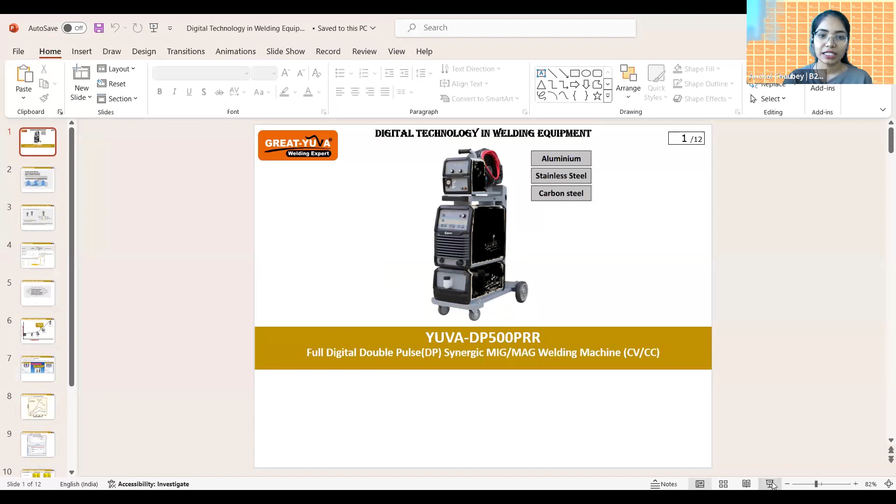Amrit Yoga has also established technical training institutes such as MACE Manesar and collaborated with industry associations and government bodies like CII, IIW, IWS, and MSDE. Additionally, he has partnered with the Japanese Ministry and Industry Association for knowledge exchange.

His expertise lies in welding technology, particularly arc welding and its components, equipment, consumables, and shielding gases. Mr. Amrit Yoga will discuss digital technology in welding equipment.

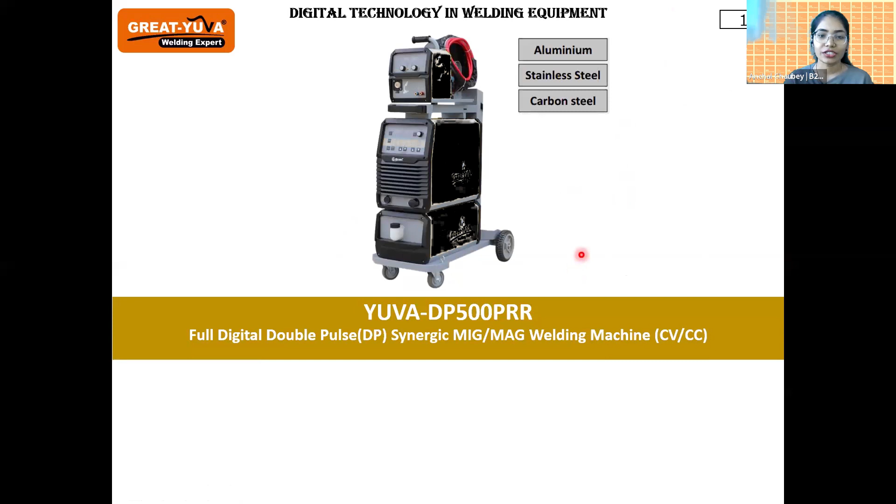So I'll talk about a digital technology which is catching up in industry, and there are many benefits: it is saving filler wire, and it is helping the operator create a very good weld. Even if the operator makes little mistakes, the machine forgives the mistake and supports him to create very good welding. This feature is very important because PM Modi's slogan is make in India for the world. So unless we make the best of the best product possible, we won't be able to export it for use abroad.

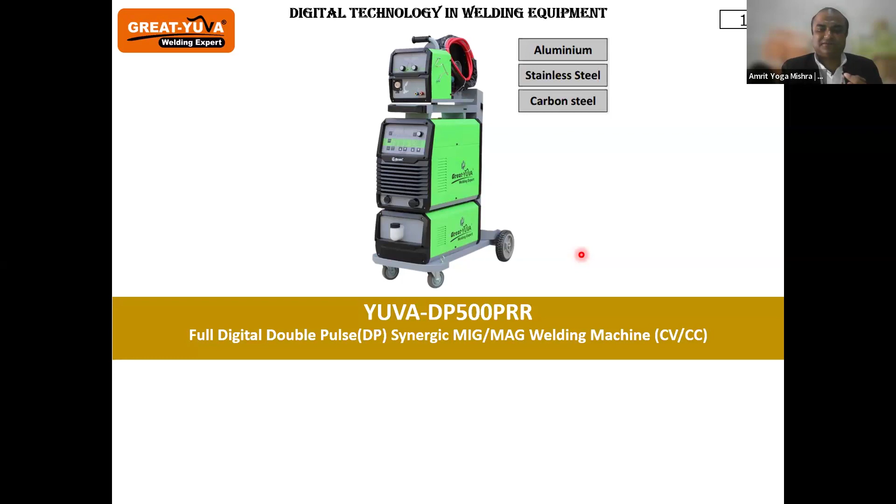So I'll talk about the double pulse welding machine, which is digitally controlled. You can see this is double pulse welding. It gives almost a TIG-like bead appearance, a very high aesthetic standard. The speed is of MIG, but the quality and aesthetics you get are of TIG.

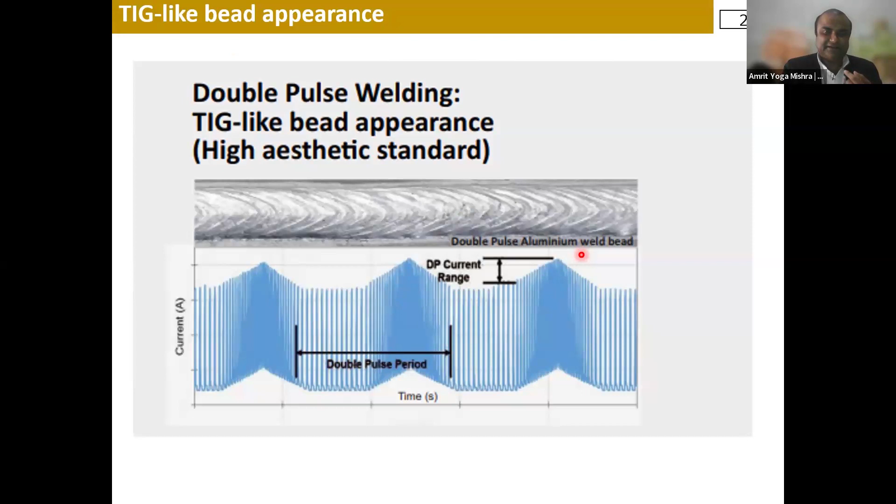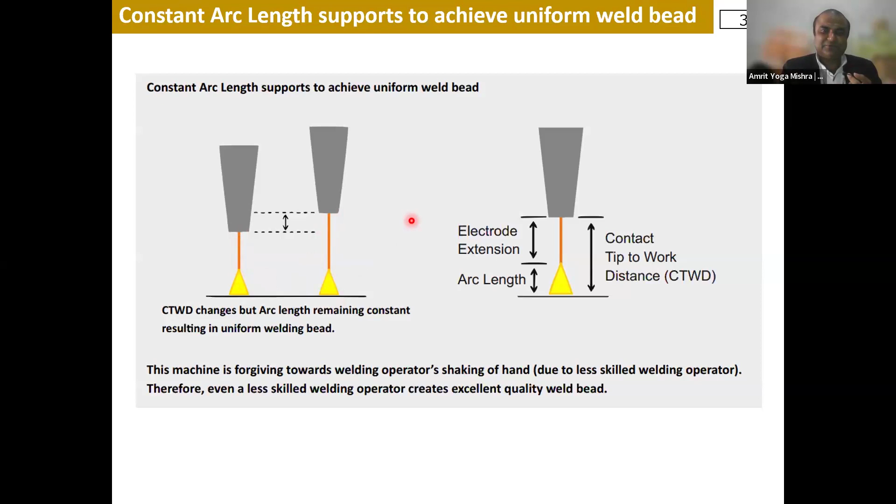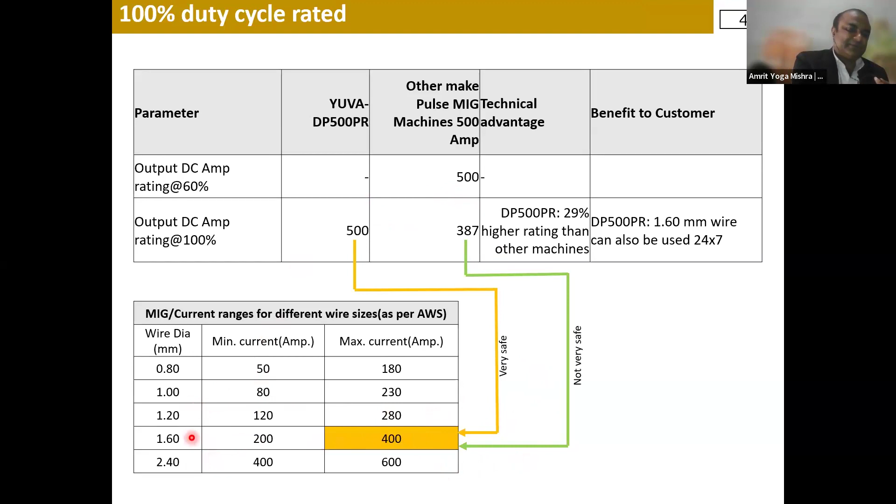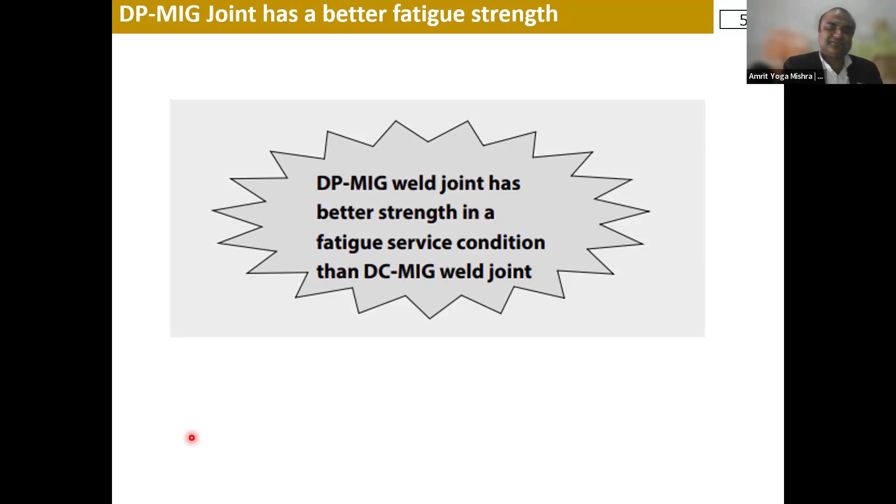I would like to explain how the evolution of the welding machine has taken place over the last 100 years. First it was only transformers, then diode-based rectifiers, then thyristorized, then there was a step change in technology, the inverter with analog control. And the latest machine which I am talking about is the inverter with full digital control.

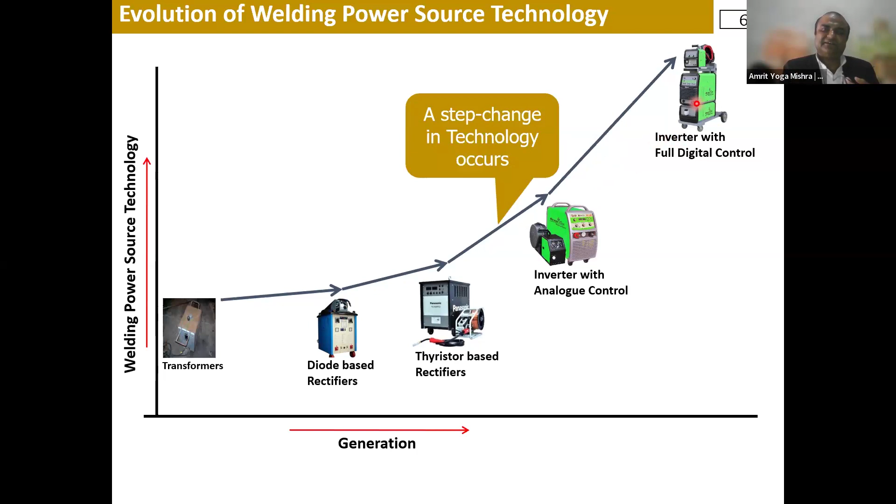It is almost double the price of a basic inverter machine. But customers have now started to realize the importance and benefit they are getting out of it, and they are slowly implementing it on their shop floor. See what the benefit is.

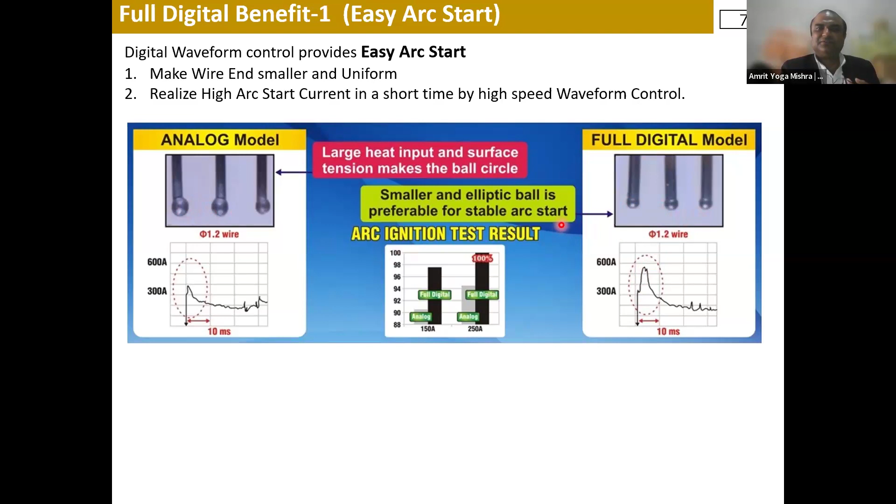Here, the left side is the analog model, a conventional model, and the right side is the digital model. You can see the waveform is highly advanced. For the initial hot start current, a much higher current surge is there in the full digital model. There is a very big ball in the analog model. Here it is a very small, elliptical ball. So it is very good for a stable arc start.

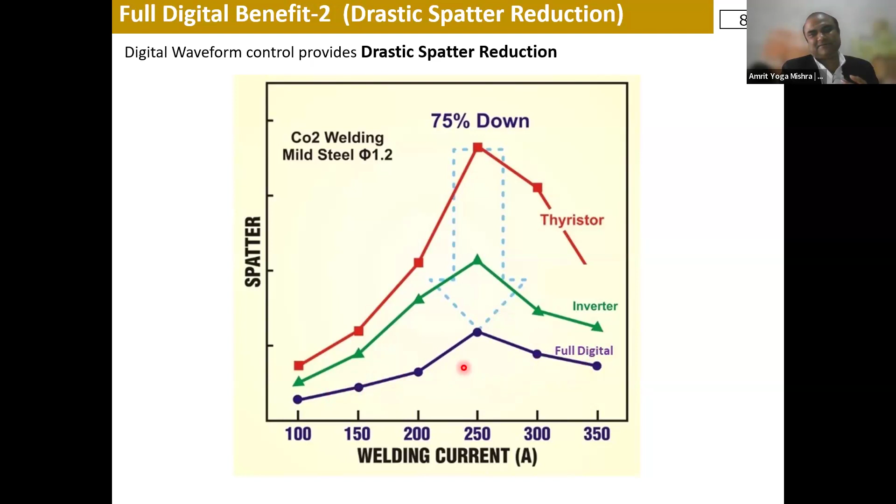See, this is the trend of spatter with respect to welding current. It goes like this when current is increasing. At 250 amperes there will be maximum spatter, and thereafter it comes down. The trend will be the same in thyristor, inverter, and full digital. But thyristor is a big pain for customers. By implementing full digital, even though the spatter trend is the same, the amount of spatter is much reduced, almost 75% compared to conventional welding machines.

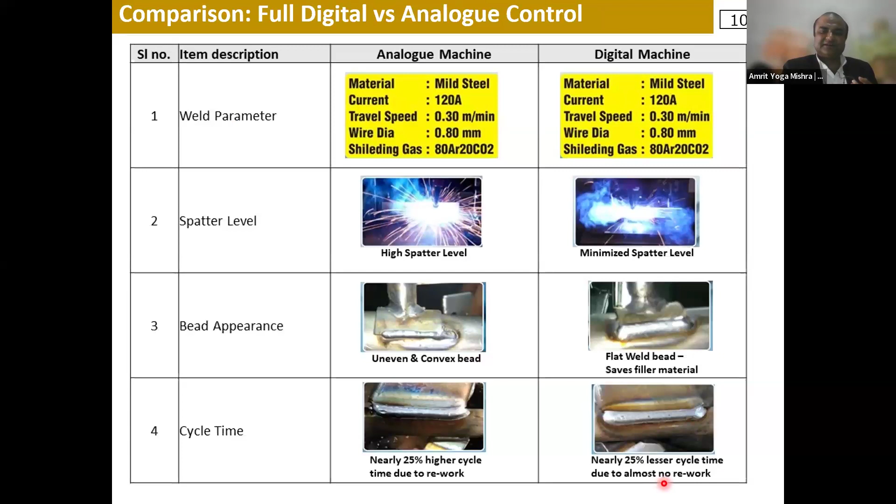And nearly 25% higher cycle time because of reworking. But here 25% less cycle time due to almost no rework. Straight away you can send it for painting. And there are these extra benefits you can see.